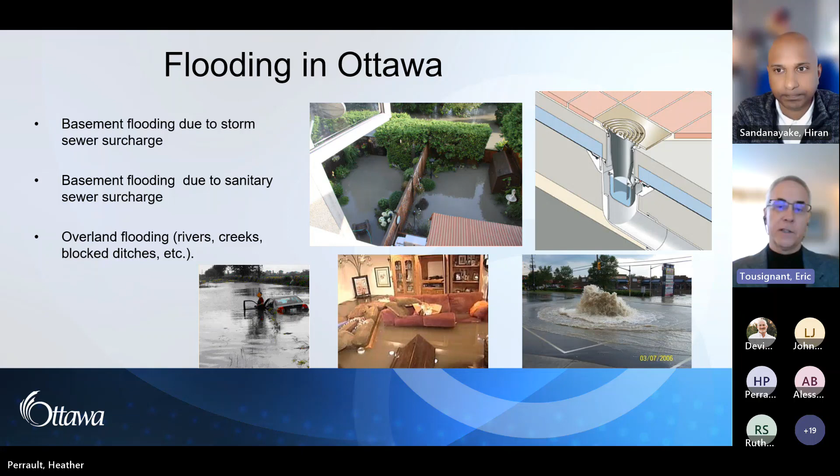Next slide, please. For you to be able to understand the types of flooding, I'm just going to touch base on the types of drainage systems we have.

On your street you have catch basins, and in those catch basins there are sometimes manholes with perforated covers - those are storm sewers. The storm sewers capture the frequent runoff from frequent rainfall events. It basically takes that underground into a pipe system to an outlet. That outlet could be a creek, a river, or a stormwater management facility - that is the storm sewer system.

Also on the street we have sanitary sewers. The sanitary sewers basically capture the waste that's flushed from homes, the domestic waste, and it takes all of that to the sewage treatment plant. We have one large sewage treatment plant in Ottawa near Montreal Road and Highway 174, and basically all the sewage from Stittsville to Orleans and Barrhaven goes down to this treatment plant.

The waste is treated at that plant and then returned to the river once it's treated. We also have ditch systems, and ditch systems, like storm sewer systems, capture the frequent rainfall events. When it rains, they're meant to capture the runoff that runs from the properties and the roadway into the ditches and to an outlet through either a stormwater management pond, a creek, or a river. In some cases, the outlet is a storm sewer, where the storm sewer captures the ditch flow.

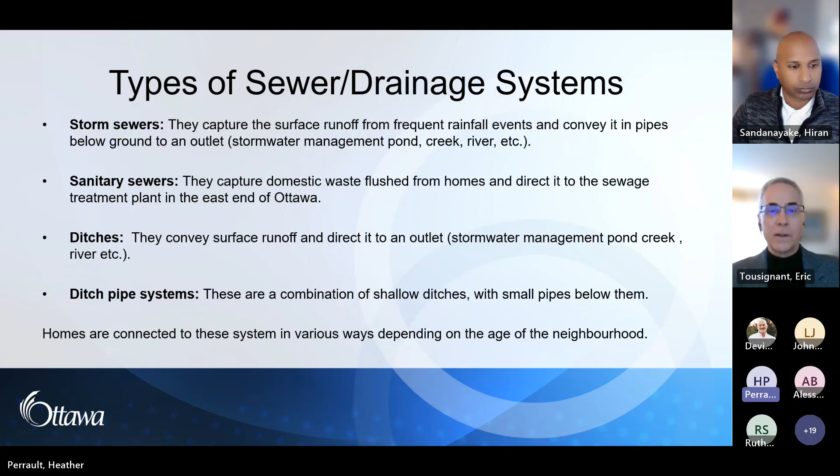Oh, can you hear me? Sorry about that. I'm going to have to reshare the screen. Okay, so that you understand - sorry, was there another slide in between that? Was that the next one? Yes, okay, that was the next one.

Thank you. So for you to understand how you could be impacted by the various systems, it really depends where you live in the city and how old your subdivision is - when the system was built. The reason for that is we have areas of the city that we call partially separated. What that means is that on the road you're going to have a sanitary sewer, shown in red on the figure, and a storm sewer, shown in green.

The sanitary sewer captures the domestic waste, but prior to the mid-1960s the construction practice at the time was to take your weeping tiles, your foundation drains, and drain them to the sanitary sewer. Often that sewer was lower, so the drainage from around your home and foundation would go there. If that system got overloaded, it could back up through floor drains or basement plumbing and cause flooding that way. So areas we call partially separated are more prone to flooding from sanitary sewers.

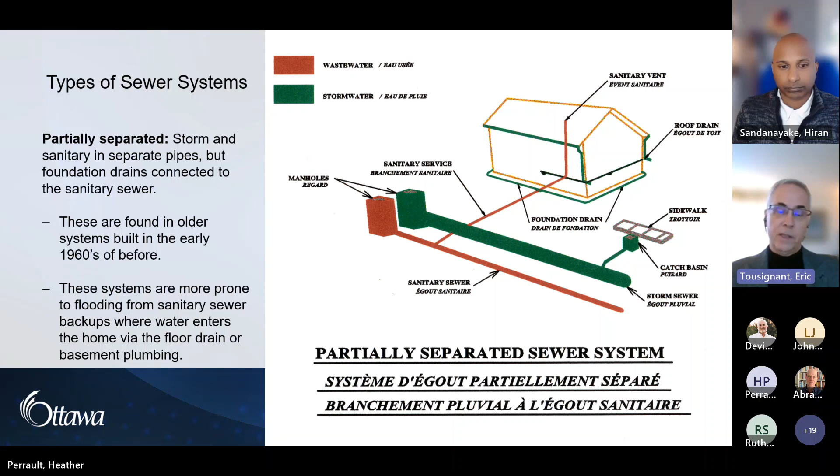If you're in an area we call fully separated - if your house was built after the mid-1960s - what you're pretty well looking at is a system where you have a storm sewer on the street and a sanitary sewer, but in this case your weeping tile is connected to the storm sewer system. If that system surcharges, water backs up around your weeping tiles and can come into your basement through cracks in foundations or floor drain cracks. That is the risk in areas that are fully separated.

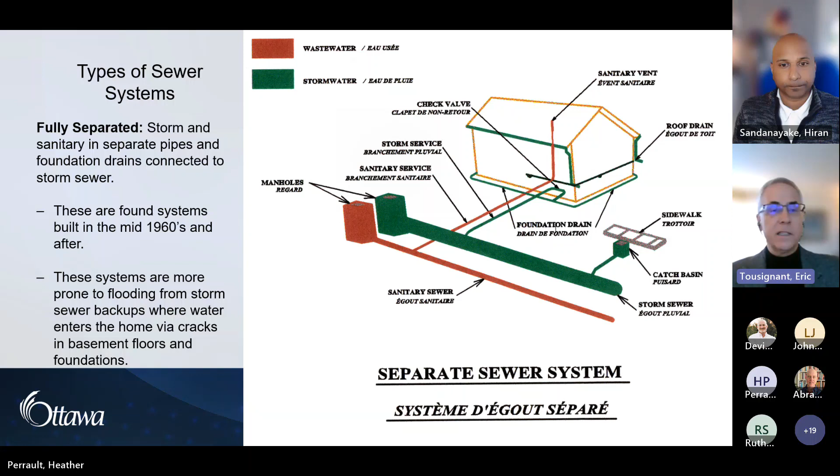And lastly, in these systems we have the ditch systems. Ditch systems rely on sump pumps to drain your weeping tiles, and they go to a ditch. So if your sump pump fails and can't keep up with groundwater levels for some reason, you're at risk of flooding as water will come in through your sump pits.

Another issue we sometimes have is that in some of these ditch systems we have sanitary sewers. If the ditch system is not properly draining, not properly functioning, or it's partially blocked, or sometimes frozen in the winter, we have cases where some homeowners will redirect their sump pumps to their laundry tubs as an outlet. What happens is that overloads the sanitary system, so sometimes in these systems you can have water coming back again through the sanitary sewer, through floor drains and basement plumbing.

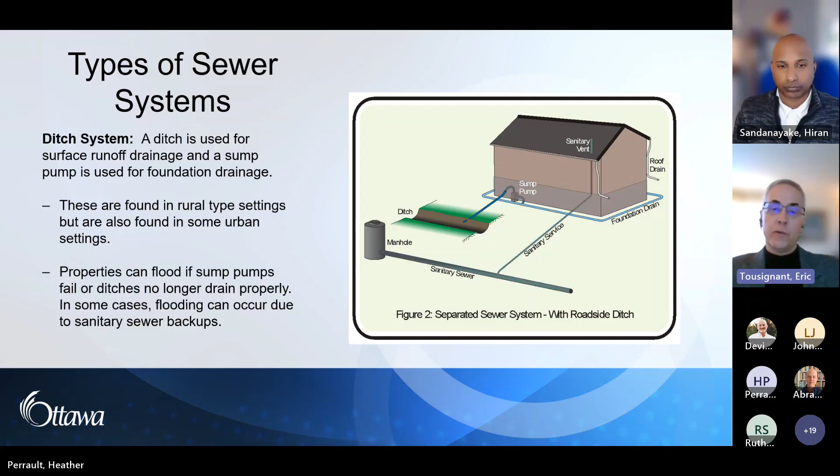Next slide, please. This picture shows you in a nutshell the systems in Ottawa where they're located. So everything in purple is what we would call the older part of Ottawa, mostly built prior to the mid-1960s. We call it the partially separated system. And the partially separated system is more prone to backup from sanitary systems.

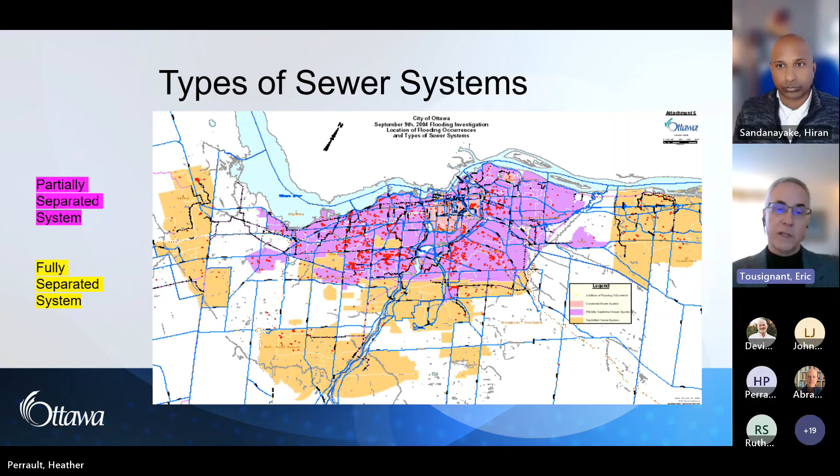And in the newer parts of Ottawa, as we move out towards the suburbs, is the fully separated system, which for the most part is more prone to flooding from large thunderstorm events, the storm sewers. And in newer subdivisions, measures are taken in place to basically protect these systems. That's for another topic. We'll talk about these wards specifically. But if we go to the next slide, I'll zoom in on the wards itself.

that are failing. And which happened in 2004 in that area, we had excess flow make it to the sanitary sewer. In 2004, we had Hurricane Frances hit, which was a very severe event. A lot of rain fell over 24 hours. So all the weeping tiles were contributing to the partially separated system. Sump pumps were being redirected from ditches into the sanitary system, and we had some widespread flooding throughout the city. And City View had flooding mostly due to sanitary sewer backup.

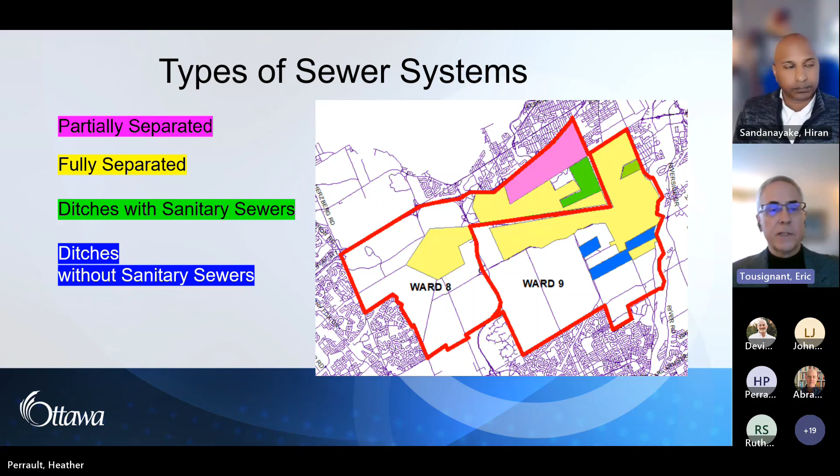In blue are areas that are just ditches without sanitary sewers. So those areas are more prone mostly to sump pump failure or too much water around the home that could seep through the foundation drains, through the foundation, through cracks and windows and so on. Next slide, please. So how are you affected by the different types of events?

If you're in the purple area, the partially separated area that I showed on the previous map, what you're more prone to would be what we're having these days, where the groundwater is saturated, and then we have a lot of rainfall on top of that. Events that caused widespread flooding in the city, in the sanitary system, were 2004 Hurricane Frances, and we had another hurricane remnant in 2017. In these events, more than 100 millimeters of rain fell over 24 hours in the city.

All that rain saturated the ground, filled the weeping tiles, and in those systems, the weeping tiles are connected to the sanitary. It overloaded the sanitary system, and it basically backed up into basements via floor drains and basement plumbing. If you're in the yellow areas that I showed on the map, that's the fully separated system, and you're not going to be affected in that area by events that we're having today.

What you're more affected by in those areas are the severe thunderstorms, when too much water falls in a very short duration. So a severe storm will drop a lot of water in, let's say, an hour or a few hours. That water gets into the storm sewer. And once it gets into the storm sewer, sometimes you'll surcharge a storm system if too much water gets in. And that will come back through your lateral connections to your weeping tiles, and that water will make its way into your basement through cracks in the foundation or the floor.

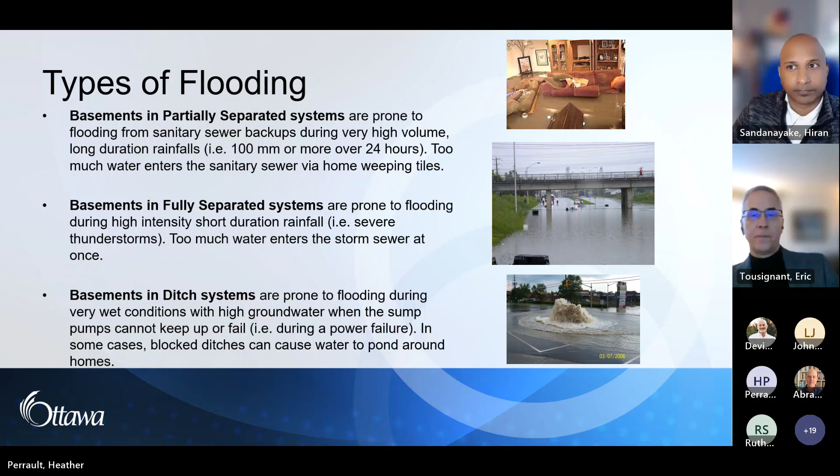I'll just introduce a few of these measures that we've worked on in the past, and some things that can be done on your property as well. Just really to segue nicely into the following presentations about Rain Ready Ottawa and the Residential Protective Plumbing Program. But let's start with what the city is doing.

Of course, a part of the drainage system that Eric was discussing exists in the municipal right-of-way. Primarily, the biggest part of that are the sewers and the roads themselves that carry water when you have large enough rainfall events. And sewers need to be replaced at the end of life. When we say end of life, we mean end of their structural life, when the sewer can no longer essentially be intact.

That's a normal part of renewal in Ottawa, but what we try to do is look for opportunities when that happens to upgrade the system as those projects happen. This is something we're already doing, but we're always trying to get better at that as well and find more opportunities to do that. Another thing is flood remediation projects or studies.

One example that Eric put on the slide here: following a large flooding event, the city undertakes a study to look at ways of reducing the risk of flooding, such as in 2004 in City View, and that resulted in the city upgrading a trunk sanitary sewer in that case to reduce the risk of future flooding. But there are other types of studies and analyses that we do.

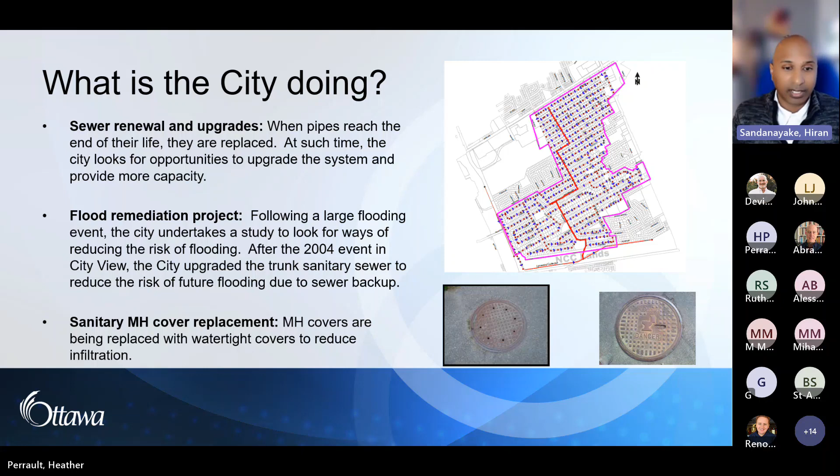And a big thing that we've done, Eric is kind of the pioneer on this, is trying to retrofit systems to increase capacity. Now, replacing pipes is a long and complicated process. We have to do it. We do it all the time. But Eric found ways to do this quicker without digging up the pipe.

And so we've done studies across the city of Ottawa, and in particular a number in wards 8 and 9, to look at ways to minimize flooding. Flooding, of course, as Eric explained, happens through basement flooding and from the surface. And one big way that we could, well, actually, I'm stealing my own thunder because it's on another slide, but we could put in something called an inlet control device, or a control device in catch basins to manage how much water and how quickly it gets into the storm sewer.

And of course, we have to do this analysis to make sure we're not flooding anything on the surface, because the water doesn't disappear, it stays on the surface. This solution, I'm just reading, Eric is noting here, yes, in some cases, unfortunately, we can't implement that solution if there's a risk of surface flooding, and some neighborhoods have a number of reverse slope driveways.

Even if most driveways aren't reverse slope, if there are still a number of them, if we put in these control devices, we may cause flooding there. So we have to be careful about that. There's a number of neighborhoods here that Eric has listed that we've done some of these studies in. Actually, I think there's even a few more in this ward that have been done recently, like Qualicum and Redwood.

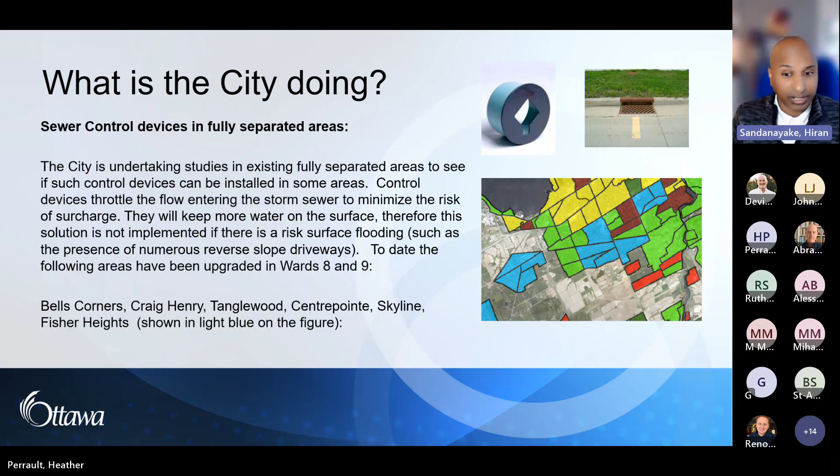And Eric talked about ditches. We're undertaking a number of ditch studies. Eric is leading the one for City View, and we're looking at trying to create rehabilitation plans for ditches. Ditches are a great piece of infrastructure when they work well.

One of the problems that a ditch has that a storm sewer doesn't have is it may be difficult for most of us to figure out that it is a ditch, that it shouldn't be altered. And when ditches are altered, it becomes more difficult to renew it. So Eric's working at studying this, as other people in our group are working at studying other areas, and we're looking to try and improve or restore the capacity of those ditches.

And finally, we are looking through the infrastructure master plan at imposing stormwater management on all redevelopment sites. That's something that happens right now for sites that go through site plan control, but the smaller residential sites don't go through site plan control, and they historically have never been asked to provide stormwater management.

Stormwater management mitigates the impacts of the new hard surfaces that development puts in. Any new hard surfaces, whether it's through development or just the stuff we do in our own backyard, like putting in patio stones, all of that increases runoff. One patio stone is just going to increase runoff a bit, but cumulatively over decades in a neighborhood, that makes a difference. And I mentioned the rest of that.

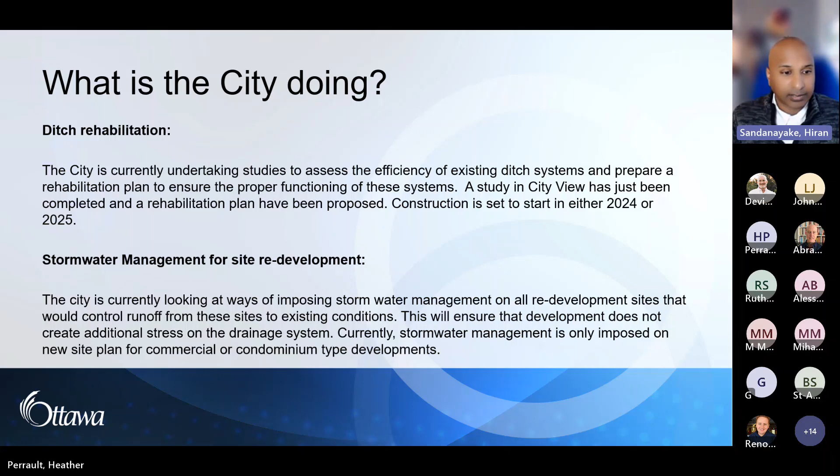Next slide, please. And so there's a number of things that we as residents can do as well on our own properties. And this is just a segue into some of the things that Connor and others are going to be talking about. First is ensure that you do have a backwater valve. Most homes need one on the storm and the sanitary lateral. And it's important, there are some areas, Centrepointe is one example, where the homes were built with backwater valves, but they were older style, so it's important to have them inspected, make sure they're working well, and if they're not, to replace them if needed.

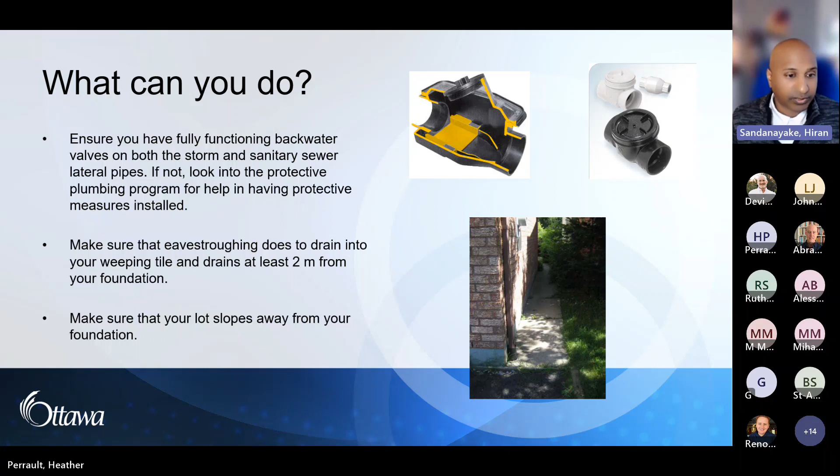Make sure that your eavestrough drain does not drain into the weeping tile directly. We see that sometimes, or sometimes it goes directly into a depressed driveway catch basin. That could cause flooding. It should stay at least 2 meters away from your foundation and drain out towards the road ideally. And of course, make sure that your lot slopes away from your foundation. Next slide, please.

And then finally, this is something I didn't understand until I started working for the city. I've lived in Ottawa for a long time, and I've had issues in some of the houses I've lived in, but I never thought to call the city. It is important to call the city to report any type of problem you have. It helps us understand what's happening and what's not working well.

It's always a bit of a detective game to try and figure out exactly how homes are connected, or what people might have changed in their home or on their property, or past municipal practices. As I think most people know, Ottawa is an amalgamated city, so we used to be multiple cities, and the different cities did different things. So any information you could give through 311 or evenings like this is always valuable. We always learn something useful.

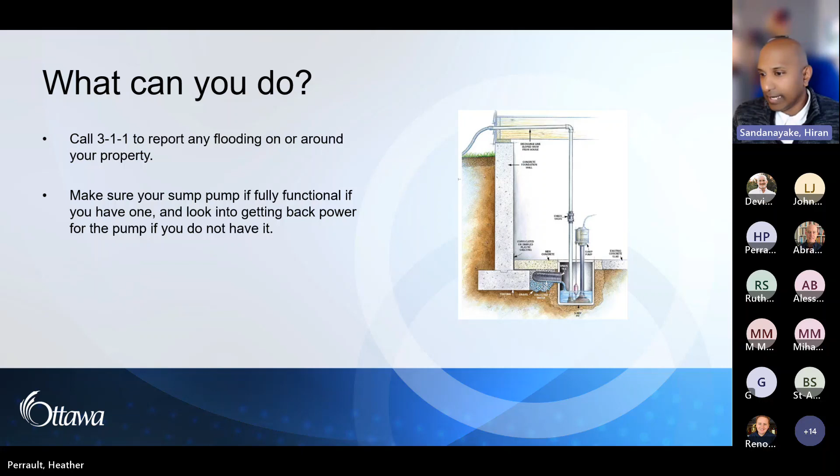And make sure your sump pump does work if you have one, and look into getting backup power if you don't have it. And next slide, please. I think that's it. That was just more or less a segue to the next sections, because you're going to be hearing a lot more about Rain Ready Ottawa and the Residential Protective Plumbing Program. Thank you.

Okay, thank you, gentlemen. That was incredibly helpful. I know there's already a few questions for you guys for the end of the session, so stand by. We'll see what else comes your way, and we'll bring them all together. So I'm going to pass the floor to the next presentation to Connor Renouf from Rain Ready Ottawa, who's going to fill you in on the programs that we have available in the city. It's over to you, Connor.

Okay, great. Thanks, Tim, and thanks, Ron and Eric, for the great overview. So my name is Connor Renouf. I'm an outreach and communications coordinator at the city, working within the Climate Change and Resiliency Unit, and I'm here to talk to you about how you can become rain ready by taking advantage of the Rain Ready Ottawa program.

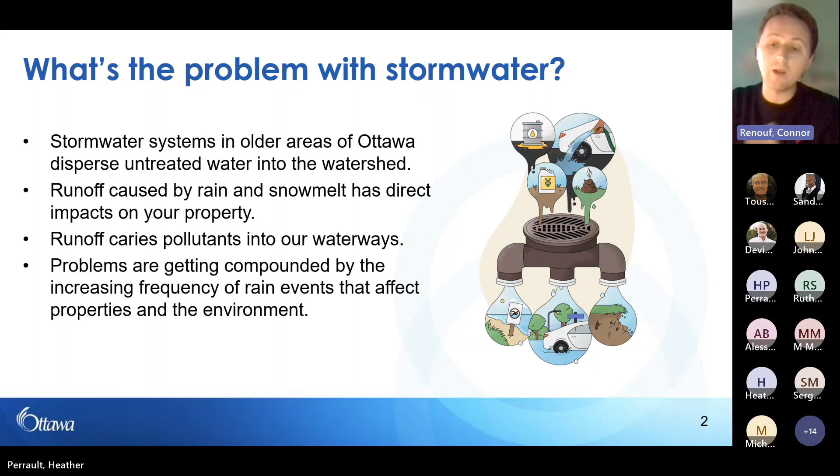Next slide, please. So, we've kind of already talked a little bit about stormwater, and we understand a little bit more what is the problem with it. So again, the stormwater systems in older areas of Ottawa can disperse untreated water into the watershed, and the runoff that is coming from your property caused by rain and snow melt has direct impacts not only on it, but also on the waterways by carrying various types of pollutants with it as it runs off. And these problems are getting compounded by the increasing frequency of rain events that affect not only your property, but the wider environment here in Ottawa. Next slide, please.

So how it impacts your home and your neighborhood. You're going to experience property damage and erosion from the effects of rainfall runoff and ponding. You can kind of see this sometimes with erosion to your driveway, cracks in your foundation, or just damage to your lawn or your landscaping.

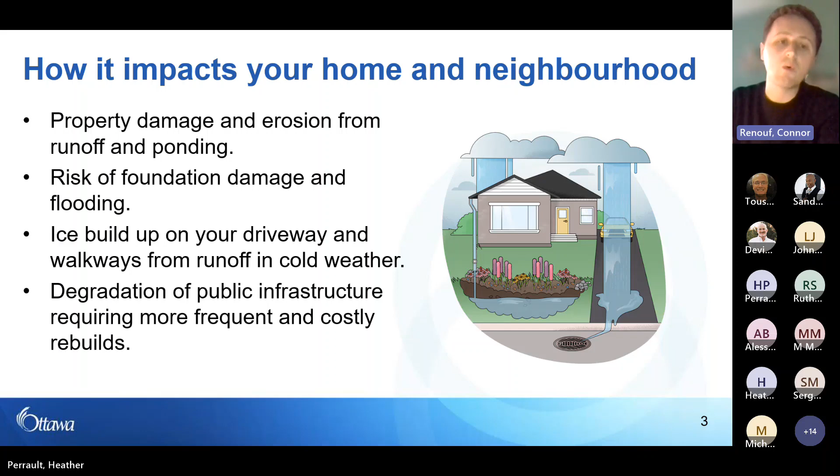This can lead to risks of foundation damage and increased risks of flooding on your property. And in the winter times when it's cold, the freeze-thaw cycle can cause ice buildup on your driveway and walkways, causing further damage to your property. The amounts of runoff going into that public infrastructure can cause quicker degradation because of the increasing frequency of rain events, requiring more frequent and costly rebuilds.

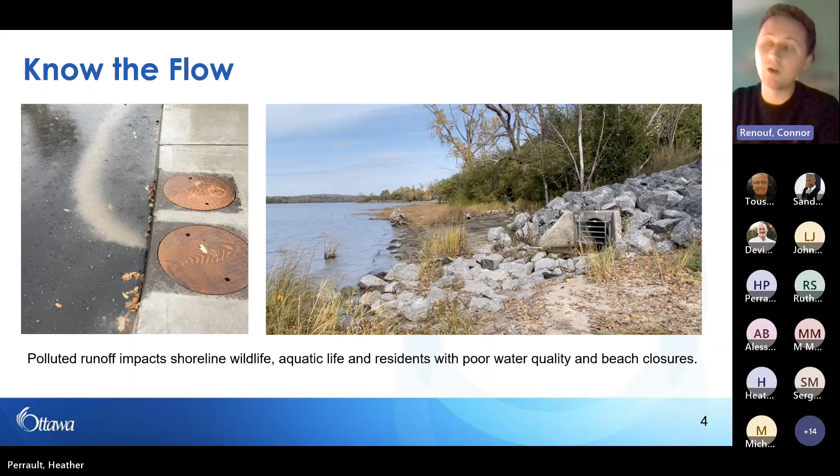Likewise, Pinecrest Creek, which flows right through the heart of both of these wards, is impacted very much so by the runoff coming from residential properties in these wards.

Next slide, please. So this poor water quality is a result again of that runoff picking up wastes, oils, chemicals, and cleaning products that end up on people's driveways, in lawns, and other areas along the public right-of-way, which then gets washed into the stormwater system, or washed directly into the environment, depending on how the drainage is happening.

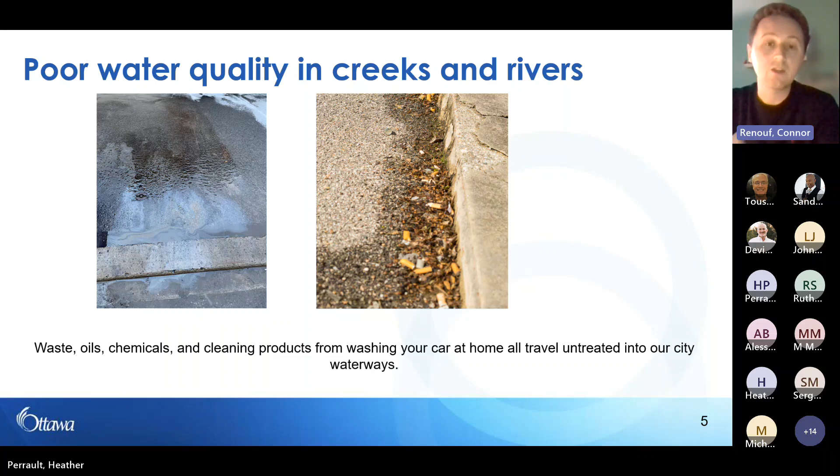Next slide, please. So the solution then is to become rain ready—a combination of public and private action. This is where you're going to learn about ways that you can take action not only at home, but also helping your wider community. That really comes down to changing how you think about runoff and identifying ways you can manage it more effectively on site where it falls.

Next slide, please. So now we're just going to go over some of these projects that you can implement at home to have an impact on runoff and rain where it falls.

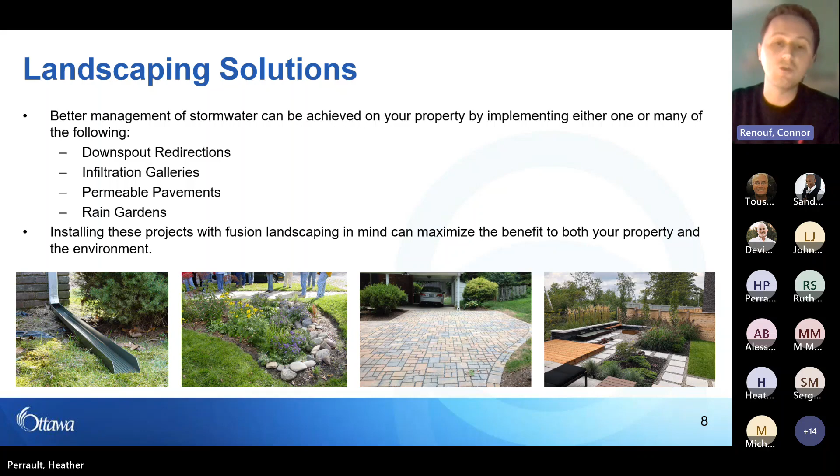Next slide. So there's a variety of landscaping solutions that you could implement. Better management of stormwater can be achieved by implementing things such as downspout redirection, infiltration galleries, permeable pavements, or rain gardens. Samples of all four of these you can see at the bottom images on the slide, going left to right. Installing these projects with fusion landscaping in mind, which I'm going to talk about on the next slide, can really maximize the benefit of these to your property and the wider environment as well.

Next slide, please. So fusion landscaping is a discipline that combines the science of hydrology with the art of horticulture. This fusion design approach considers stormwater management in the creation of landscapes.

Through the Rain Ready program, we provide training to landscape professionals here within the city of Ottawa to rethink how, when they're designing a landscape, they consider how rainfall is going to be managed where it falls on your property. Likewise, you can apply these same principles at home when thinking about how you can change things up. FLPs trained through the Rain Ready program are certified in the design, installation, and maintenance of these landscapes. It can help create a beautiful landscape while reducing flooding.

Next slide. So the first thing you can do before we really get into the more fusion landscape elements is just go outside and think about how you could relocate or redirect your downspout.

Downspouts dispersing too close to your home or on hard surfaces like your driveway can cause a lot of problems, including erosion and wear and tear of your home and driveway, and wear and tear at the edge of it as well.

Simply extending your downspout can help. If it's dispersing very close to your property, consider finding a way to extend it a couple of meters. Ideally, we encourage you to go up to 3 meters if possible onto your lawn, so that rain coming from your roof disperses safely into the groundwater table.

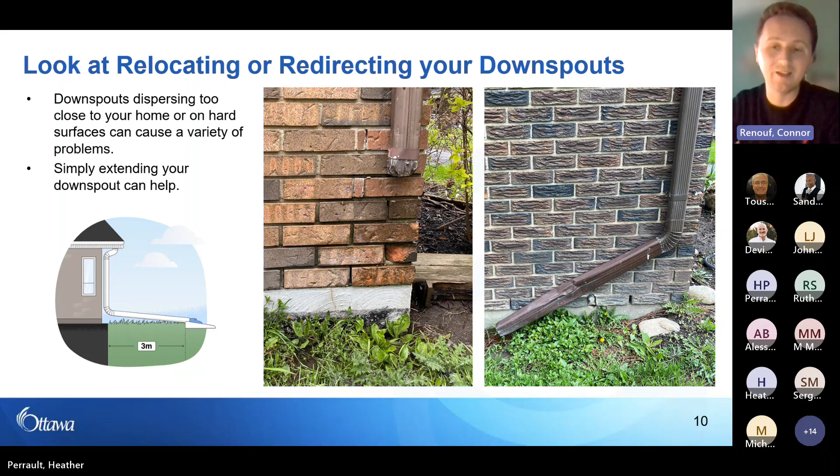But you're probably thinking, well, I've already done that, so what else can I do? There are other ways you can get more creative with redirecting your downspout and managing the rainfall coming off your roof.

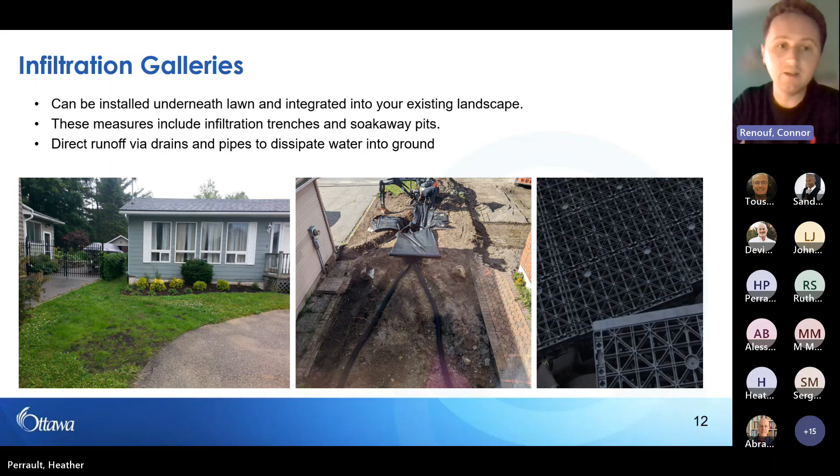On the next slide, we can see more detail in a cross-section of what a soakaway pit looks like.

Soakaways, also known as dry wells, are excavated areas lined with geotextiles, then backfilled with washed clear granular stone, wrapped and typically covered with topsoil or grass. Water is directed into the soakaway through a pipe connected to a downspout extending from your home. Soakaways can fit into a variety of large and compact spaces, and you can build your pit with chambers, like the illustration of the black box, to increase structural integrity, allowing you to put it underneath a patio or driveway and use heavier loads on top of it.

Other important things to note if you're considering a soakaway pit: make sure you consider pre-treatment options, which is where that leaf filter comes in. You can attach those to your downspout to filter out debris that may be running into it. This matters because your soakaway pit is only going to be as effective as it can be if it's kept generally clear.

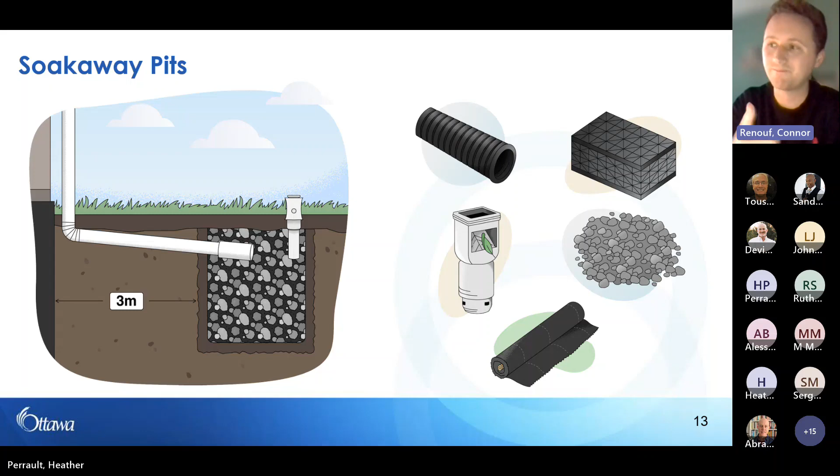If leaves and other debris get into it, it can cause it to not be as effective at dissipating that water. But keeping it clean and clear is the best way to do it, so you may occasionally have to get in there and clean it out. That's why it's important to have access, which is indicated by the white pipe sticking out in the illustration. That's a great way to get in there and keep it clean and fully functioning when it's installed on your property.

The other thing is permeable paving. Traditional asphalt and concrete is often very impervious. You can see this anytime the rain falls - if you look out on your driveway or the streets right now, you can see the water running off of it, pooling, ponding. With a permeable solution, you're avoiding that problem because water is now allowed to flow and seep right through your driveway into the groundwater table below. This prevents a lot of those issues.

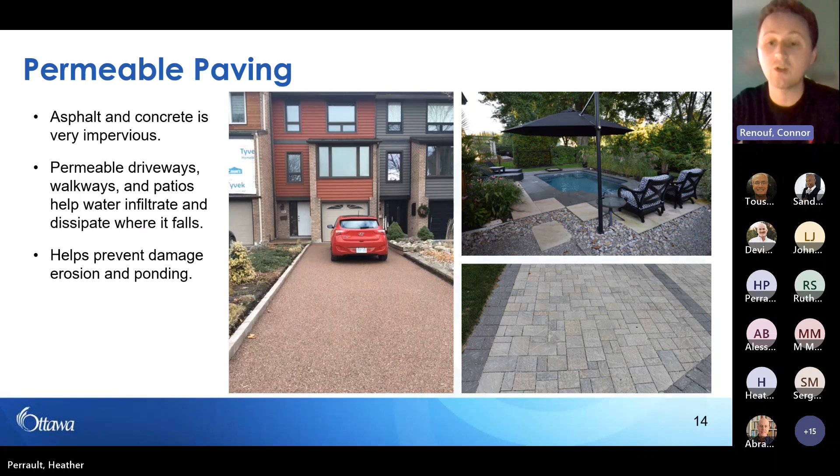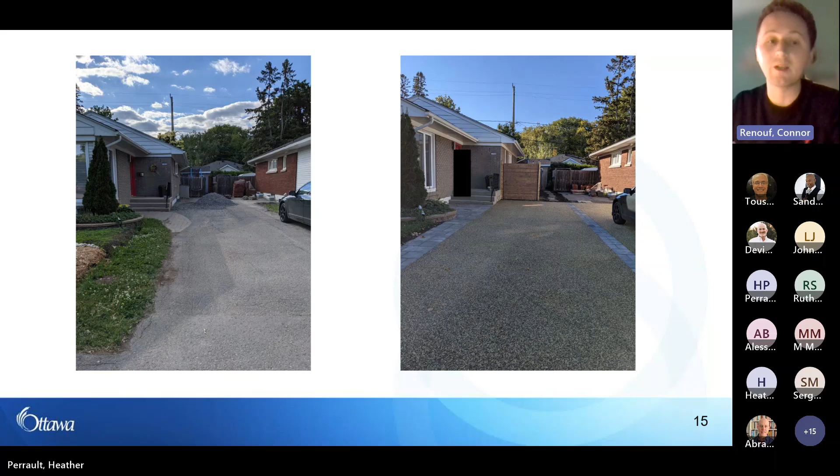Here you can see a great transformation example that we were able to support through the Rain Ready program. On the left you can see what it was before - just a normal asphalt driveway - and on the right you can see that permeable surface has now been installed. You can incorporate different materials; they've gone with an interlock border for visual appeal and curb appeal for your property. You can see the difference right there.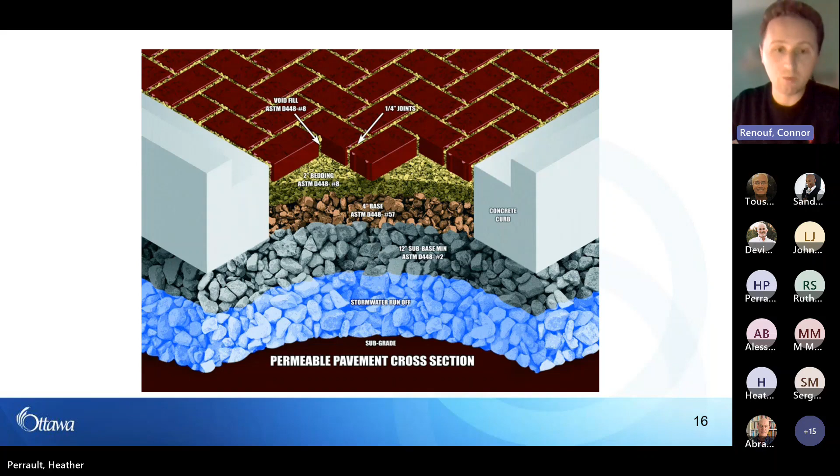This is a cross section of what's really going on underneath these permeable systems. It's more than just that surface layer - it's multiple layers of increasing sizes of fine materials that allow the water to seep down into the ground table and safely dissipate, as opposed to running off and causing issues on your property with flooding and overwhelming other systems. Managing it on site has a lot of positive benefits. Underneath your permeable driveway there's about 12 to 16 inches of that fine material that the water dissipates and filters through before going into the undisturbed soil below.

Another fantastic solution is a rain garden. Rain gardens are specifically designed to receive stormwater and allow it to be slowly absorbed into the soil through irrigating those plants and well-drained soils. A big part of a rain garden is getting in there and amending the soils to increase the drainage potential. You'll often dig a depressed area initially, then fill it in with compost and sand that really encourages better infiltration of water. They're then fed either via your downspouts, or you could also have a rain barrel that has overflow going to it.

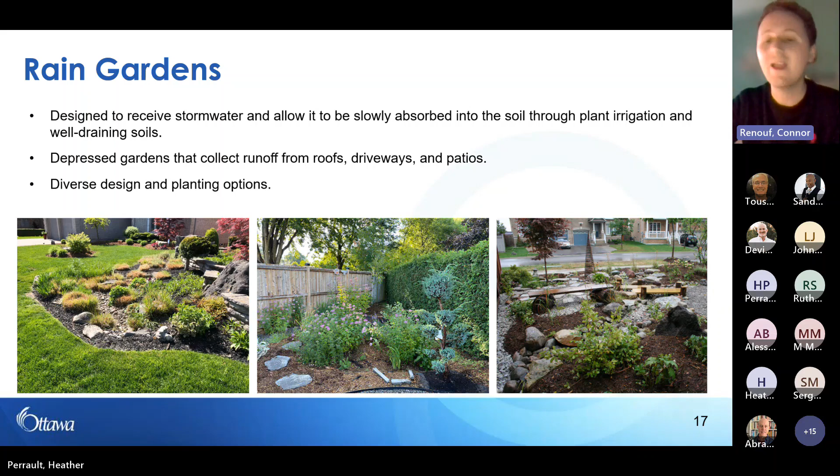This is a really safe way for rainfall coming off of your house to be dissipated into the property below. The other benefit is that you're going to be planting lots of native plants, nativars, which has a lot of great benefits to local pollinators. So it's doing two things for you at once, helping your property and helping the wider environment.

And there's lots of diverse design and planting options, an example of which we can see on the next slide. So if you're living close to Manordale Park, you can go down in front of the community center and see an example rain garden that we have planted through this program.

The image on the top left is the planting plan, so you can get an idea of the kind of plants you're going to place in one of these rain gardens. At the top of the image is where the downspout flows into the rain garden, and then it flows downwards towards the street at the south end, filtering and slowly dissipating that water into the plants below.

It's also important that at the lower end of your garden, or wherever you're directing the water, there is an overflow, because in high volume rain events there's a chance your rain garden will be overwhelmed. It's important that you're still dissipating that excess water to a safe place.

In the bottom left, you can see the type of plants you can put into one of these rain gardens. We've got little bluestem, lobelia, coneflowers. These are great local plants that are fantastic species for soaking up water, protecting your property, and adding a great burst of color. On the top right, you can see the bloom time of all these different plants, so you can get really full season interest out of a rain garden, increasing the curb appeal of your property.

The cross section below, the profile view underneath the bloom timing, shows how that rain garden is functioning. The water comes in from the downspout, filtering through the plants. You can see where the soil has been excavated deeper as a place to encourage that water to eventually settle as it flows through, then dissipate into the groundwater table below.

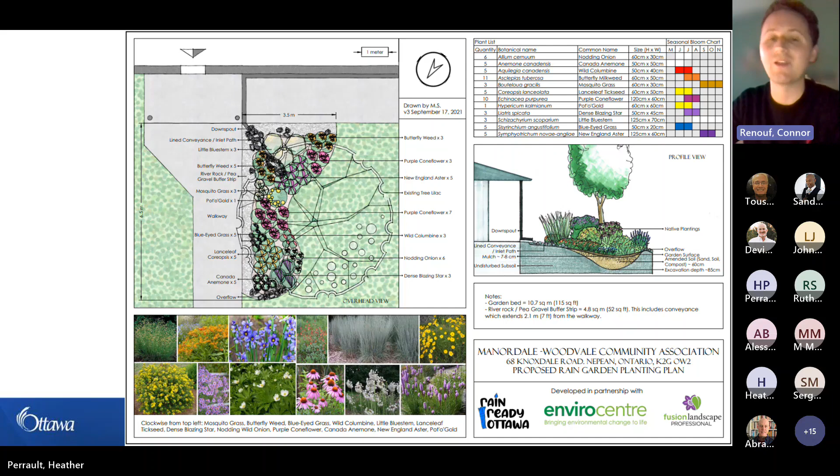So these are a fantastic solution. I encourage you, if you're by Manordale Park, to go check it out. It's still waking up from its springtime slumber, but throughout the year you're going to be seeing these plants come into life and everything that a rain garden can be.

This is just that transformation. You can see the kind of excavation required to do a rain garden, but afterwards, when it's completed, it doesn't look too much different from a normal garden. There's a lot more going on underneath that has benefits to your property for rainfall management.

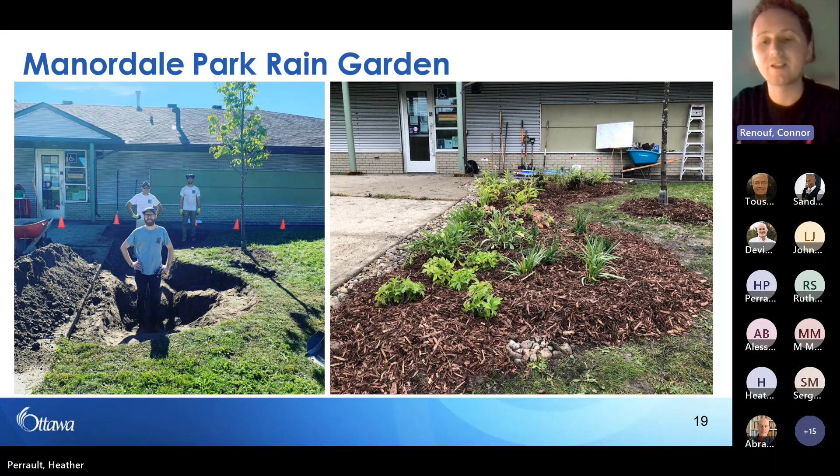You can definitely explore implementing these on your own, but if you're looking for professional help, you can go to fusionlandscapeprofessional.com or reach out to myself at rain@ottawa.ca, and I can supply you with information on certified companies here in Ottawa who know how to help you design and implement a landscape that is not only visually appealing but also effective at managing rainwater and keeping your property better prepared for stormwater and rainfall.

I'm going to talk a little more about how you can take advantage of everything Rain Ready Ottawa has on offer. The first thing is we've just launched a series of free online bilingual courses through our e-learning program. Through this system you're able to learn at your own pace, all done online. You can learn more about stormwater in Ottawa and its impacts on your property, and more specific advice on projects like how to redirect your downspout, how to create a great rain garden, and how to install a soak-away pit.

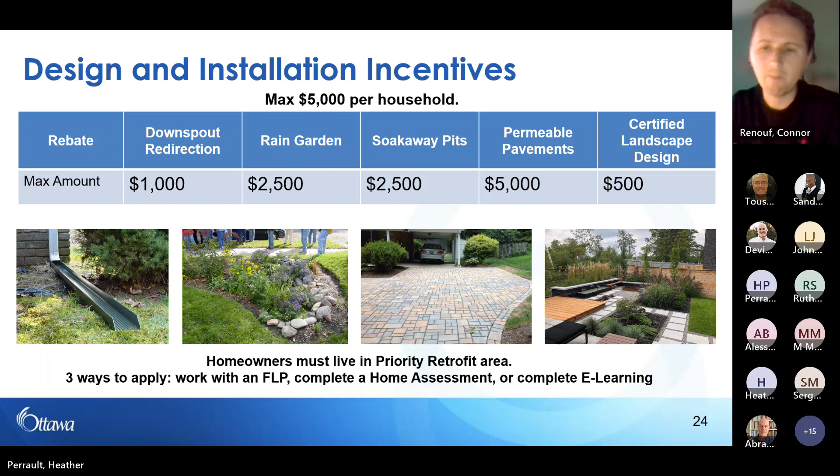First I'm going to go through the rebate process—my apologies. It's a very simple 5-step process to get one of these rebates. Just verify your eligibility, then complete one of those three criteria I mentioned: get an FLP quote, complete the e-learning course, or if you've already signed up for a home assessment, complete that process—or if you've had one previously, that also qualifies you for a rebate. Then fill out and submit your application on ottawa.ca/rain. This gets reviewed by myself, you'll hear from me for approval, and then you can move forward with installing your project, submitting your claim through a claim form which also gives you project approval, and then just get a rebate in the mail. Very simple. On the next slide, we'll talk more about those priority areas.

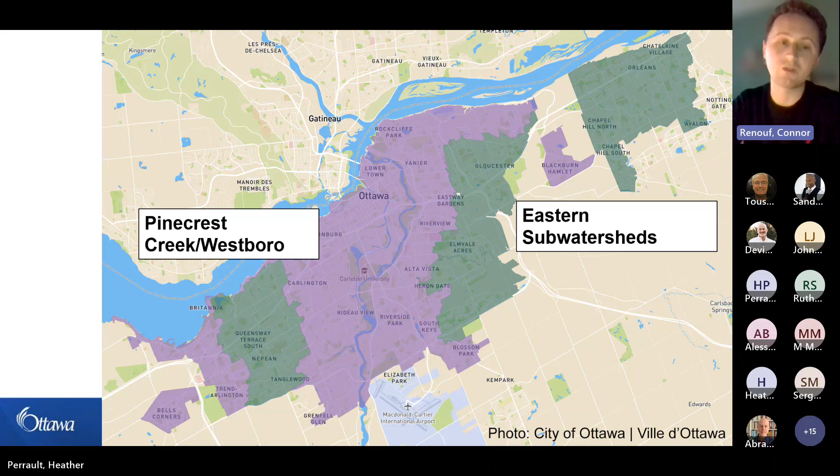On the map, you can see highlighted in green the priority retrofit areas—these are the areas where we're currently offering these rebates. You may be wondering why it's restricted to those areas; that's because the city has completed retrofit studies there and determined these are the areas where these interventions can have the most significant impact right now. But there is an intention over the coming years to do more retrofit studies, which will be incorporated into expanding the rebate zones through this program. Let's go to the next slide and zoom in more on the Pinecrest Creek, Westboro area, what we call this retrofit area.

And you can see the kind of neighborhoods that are sort of falling into this area. So you've got, again, Centrepointe, Kenson Park, Craig Henry, Tanglewood, Bel Air, Iris, Queensway Terrace South. So if you live in any of these neighborhoods, you are applicable for one of these rebates at this time.

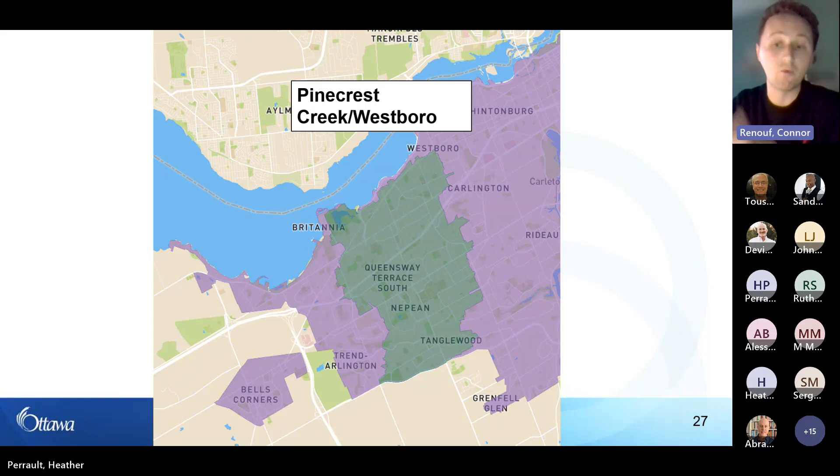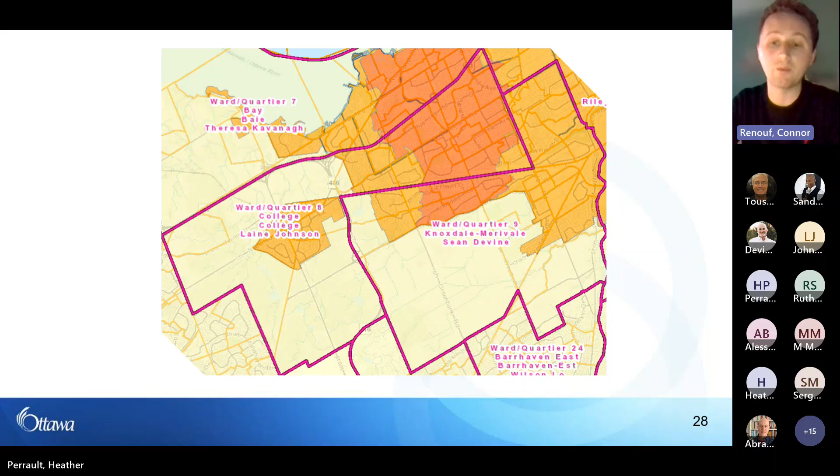So next slide, please. But there's lots of other ways to get involved. This program is a lot about education, helping you understand the effects of rainfall and ways you can adapt. So I also encourage you to get out there and check out one of the city's demonstration rain gardens. So again, there's Manordale, but also if you find yourself in the East End and Orleans, there's also ones at Pierre Rocque, and we're putting one in at Aquaview Park later this month.

Talk to your friends about what you've learned today and how they can be rain ready and take advantage of these resources. Again, just get outside and watch how the water is flowing on your property, because that may help you identify places where these rain ready projects will be perfect to install. And again, look at those simple fixes as well, like just doing a downspout extender.

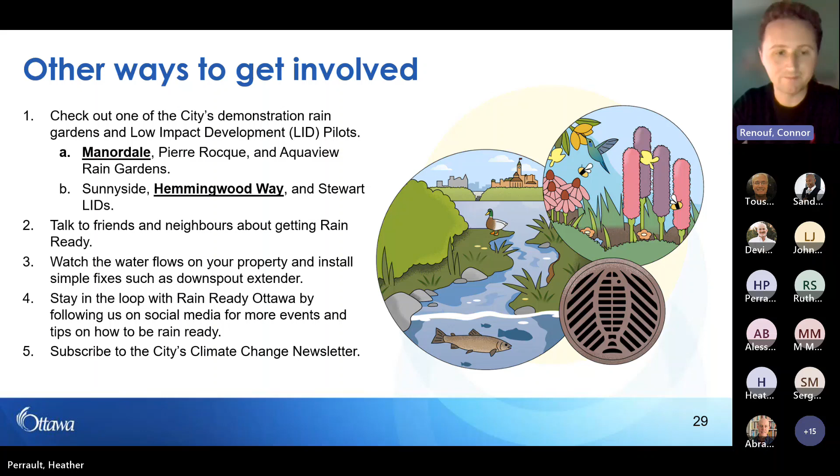Next slide, please. So again, you can see this is an example of that LID project within the Centrepointe neighborhood on Hemingwood Way. So get out there, check it out. Same idea. You can see how the water, instead of just going straight into the stormwater system, is being filtered into this system and managed by plants and natural systems instead. And this is just a really new, exciting project that we're trialing to see the kind of impact that this can have. And then on to the next slide.

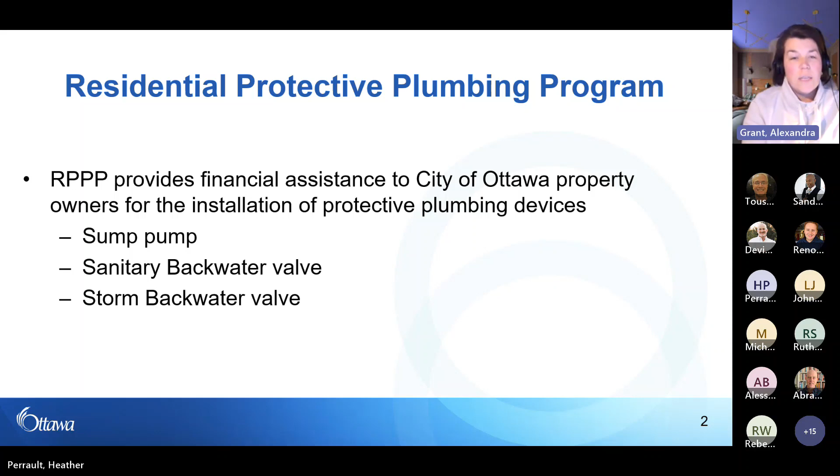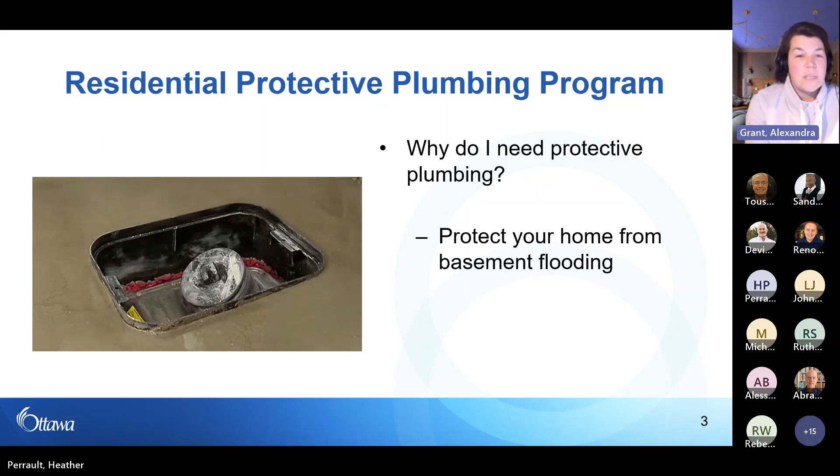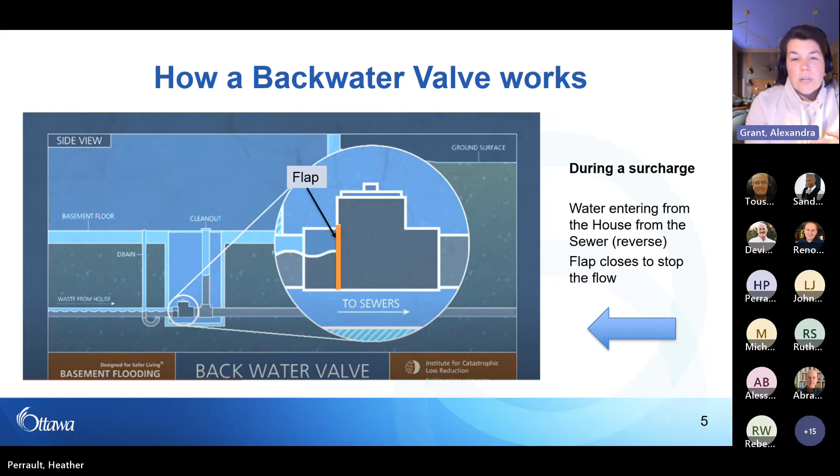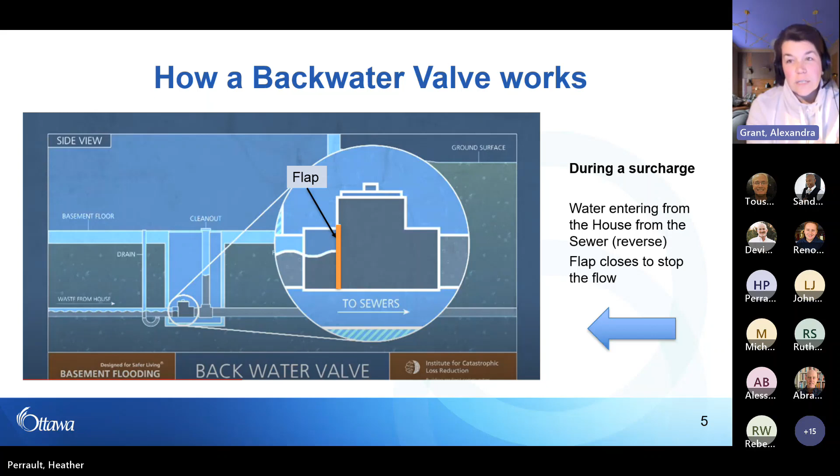So if we just flip over, you can see I tried to highlight here where the flap is. So when the water comes back the other way, which could happen today, when there's a lot of water getting into the system, the flap goes up. It's a little floating thing. It's very simple, come to think of it. It's not technical at all. And it stops the flow from coming into the home and from flooding your basement. So that's, in a very quick nutshell, what the backwater valve does to stop the flooding of your home. Next slide, please.

Many homes already have them installed, so you may not need them. If your home was built after, I believe it's 2012, then the home would already have them. But if you don't have them, then you can absolutely qualify to get the rebate to get these installed. Next slide, please.

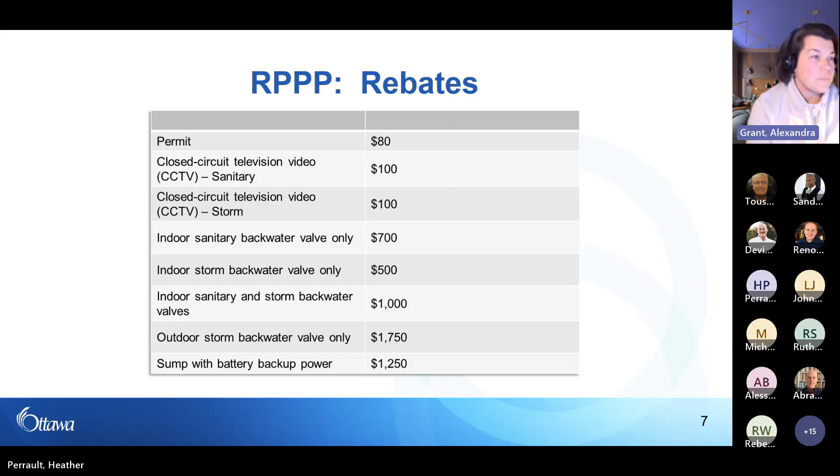In order to get the rebate for the Residential Protective Plumbing Program, there are two parts. It's pretty simple, actually. Part one must be completed by a licensed plumber. There's a breakdown on our website of what you need, but the main part is it must be a licensed plumber that fills it out with you. And then part two, you would fill out once the work is completed and within 1 year of part one being approved.

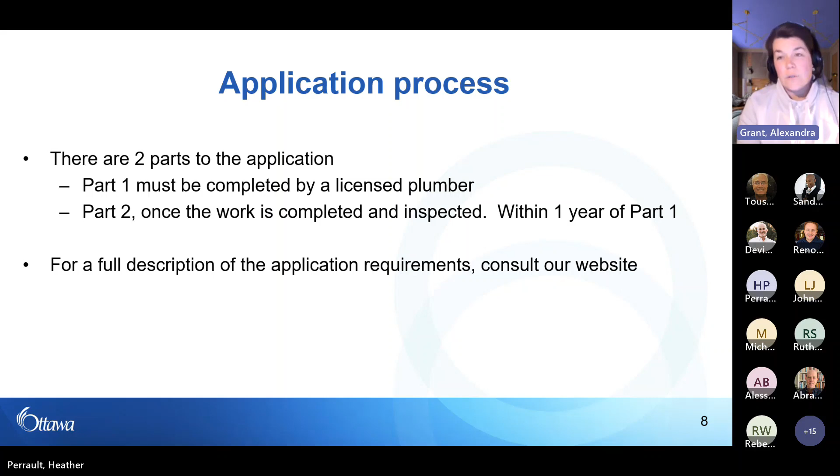And again, for a full description of the application requirements, please consult our website. It's very detailed there, what we accept, and how to go about doing it as well. Next slide, please.

Part one is available on our website, as I mentioned. It's an application form, so you would need to have the application form, and you would need to have a proof of ownership. That's typically your tax bill. There's also a section that is prepared by the licensed plumber, including the detailed listing of the proposed work, the quote for the proposed work, and the detailed diagram showing existing conditions and the proposed work.

So what's there now and what they will be doing. And I will stress that that is important. Other than inspections, it's one of the only ways that we know what you have and that you are going to be benefiting from that. So it is important, and this is why it needs to be filled out by a licensed plumber. Next slide, please.

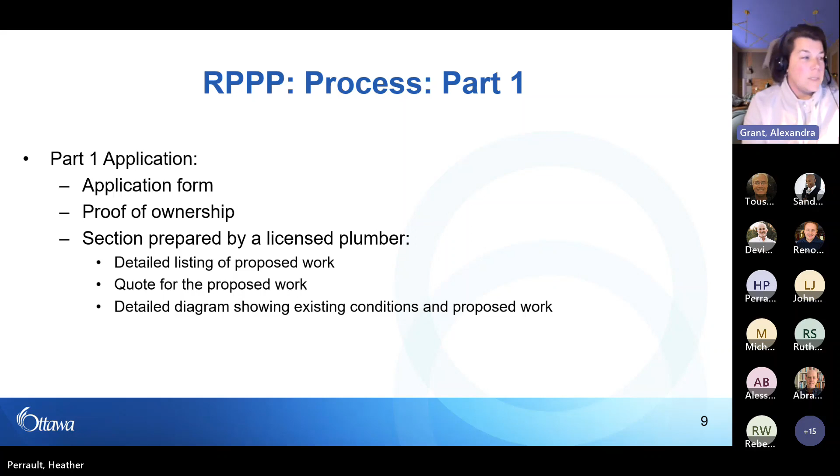Part 2, the second part of the application, you would be filling in only once the work is completed and it's been inspected by Building Code Services. Part 2 includes the application form. You would need to include a copy of the building permit, including the receipt, marked paid. You would need the original contractor's invoice, again marked paid in full, and a copy of the Building Code Services inspection report,

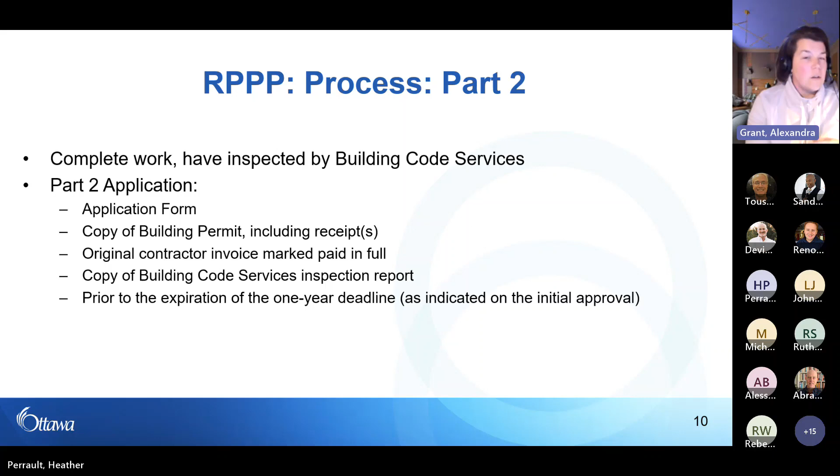prior to the expiration date of the 1-year deadline. So again, it needs to be within 1 year of part 1 being approved that you would need to fill in part 2. Again, all available on our website. Next slide, please. I do want to point out a few things, and these are questions that I get quite often, and things that my team and I see quite often.

Please do remember that you need to hire a licensed plumber. You need to complete the form and provide all required information and documents, and this is important for it not to delay your application. So if you do not include, for example, your proof of ownership or a completed list of everything that needs to be done, that application will not proceed until we have that information. So it's important to include it all. You must submit part 2 within 1 year of part 1.

That's also very important. And you must also, and this is probably the most critical part, perform maintenance as suggested by the manufacturer. Typically you would do that yearly, but probably after every rain event as well. So you would basically take a look at your backwater valve, open it up if you feel comfortable with it. It's all explained in the manuals, how to clean it. It's very important to do the maintenance, because if we don't maintain it, we don't know it's going to work, and it's important that it works.

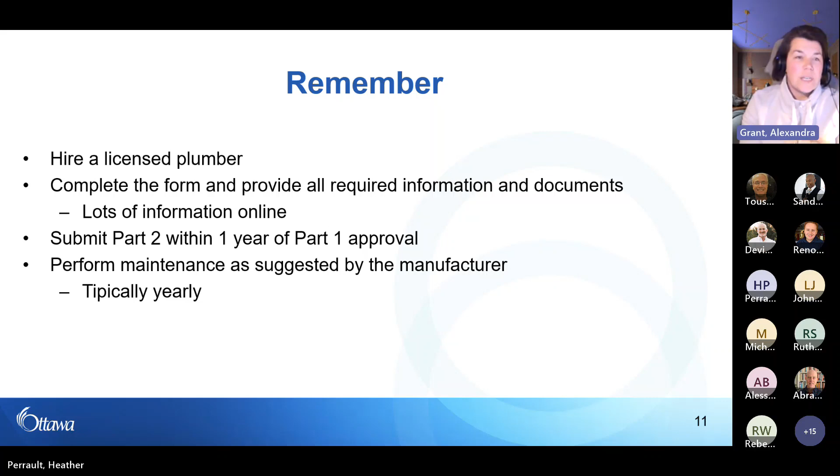And lastly, next slide, please. I just wanted to make sure that you all know where to get more information. I went very quickly over what we offer because our website has a ton of information on what the Residential Protective Plumbing Program offers. I would absolutely go there for more information. That would be ottawa.ca/RPPP, or go to ottawa.ca/flooding, where there is a whole list of what we offer and what we can do. The application forms and information are found online at those websites. Both of them link to the same Residential Protective Plumbing page.

Also, you can find the application forms at the city client service centers. They will have them there for you. In order to submit the application form, you must send it to protectiveplumbing@ottawa.ca, or you can also mail it in at 951 Clyde Avenue North. And again, that's all very well explained on our website. I can also be available to send this information out again, and I believe it's been popped in the chat. Next slide, please.

And finally, there are 2 main contacts I wanted to leave you with. Myself, Alexandra Grant, but Ray Black would probably be the main person who would have all the answers regarding this program. He's the one who sees the applications on a daily basis, and he contacts me when he has questions. So that would be protectiveplumbing@ottawa.ca, or myself, Alexandra Grant, at ottawa.ca, and I would be more than happy to answer any and all of your questions now or in the future.